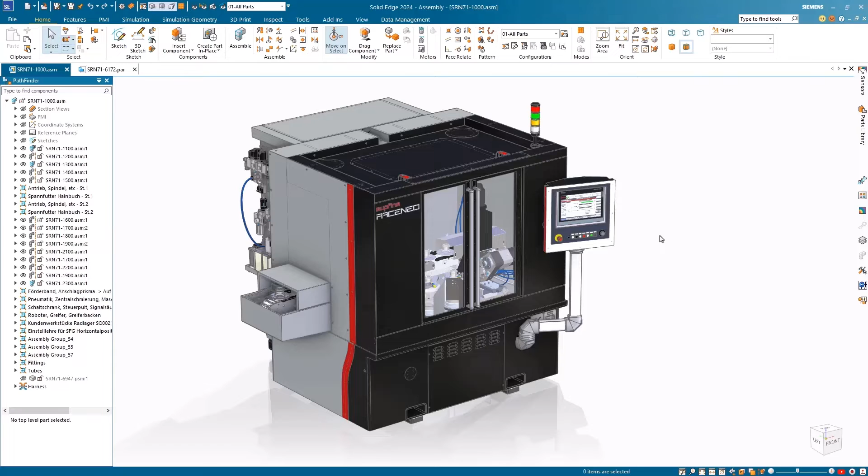Intelligently define and annotate 3D models while better conveying design intent for downstream manufacturing processes with the new Solid Edge Advanced PMI and model-based definition capabilities.

The improved Auto Dimension tool in Solid Edge Advanced PMI can be used with one or two datums for more freedom while automatically dimensioning turned parts.

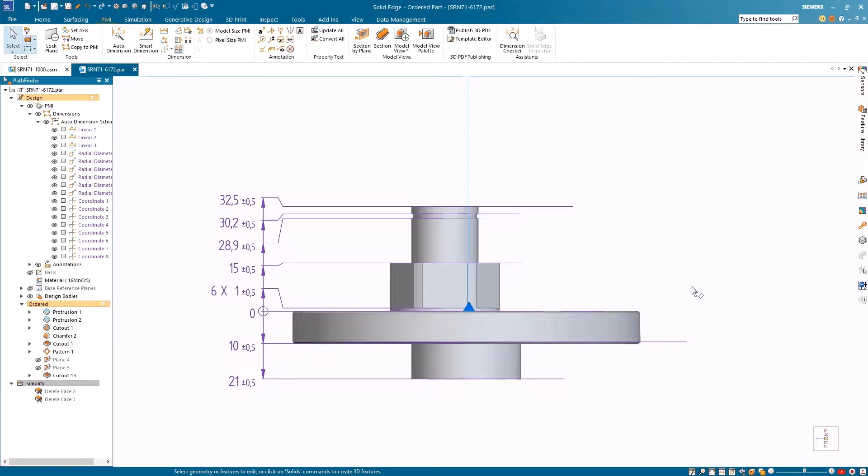Using the new Recent Documents preview will open another bracket that's been partially dimensioned.

With the new Dimension Checker command, quickly and easily identify the constraint status of features and parts. The model is automatically color-coded with feature IDs, informing you of the constraint status of features and if they lack any tolerance information.

In this example, the slot and holes are under constraint, and a dimension is missing a tolerance value. By adding the necessary tolerance, Dimension Checker will instantly update with the new status, and the Auto Dimension tool will automatically add the missing location dimensions for the holes, improving creation speed.

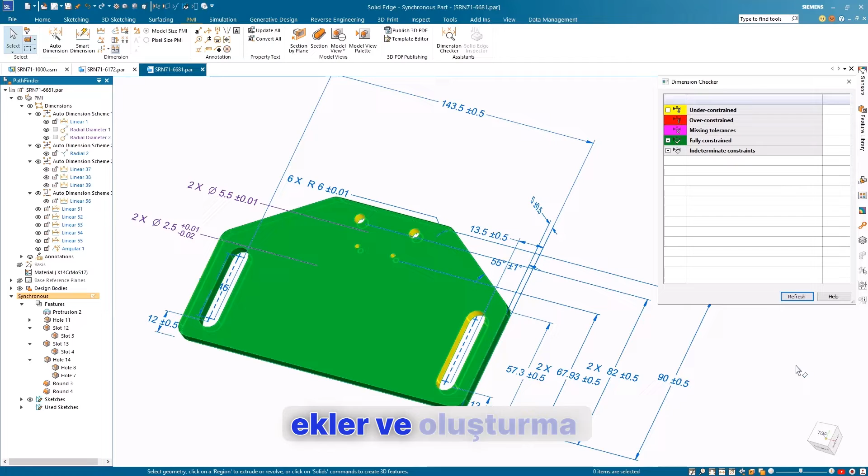The improved Auto Dimension tool also includes stacked dimensions and callouts for slot and oval cutouts. Features chosen in the selected primary, secondary, and tertiary planes can be auto-dimensioned instantly, and you can now automatically dimension location and size callouts for your created slot and oval cutouts.

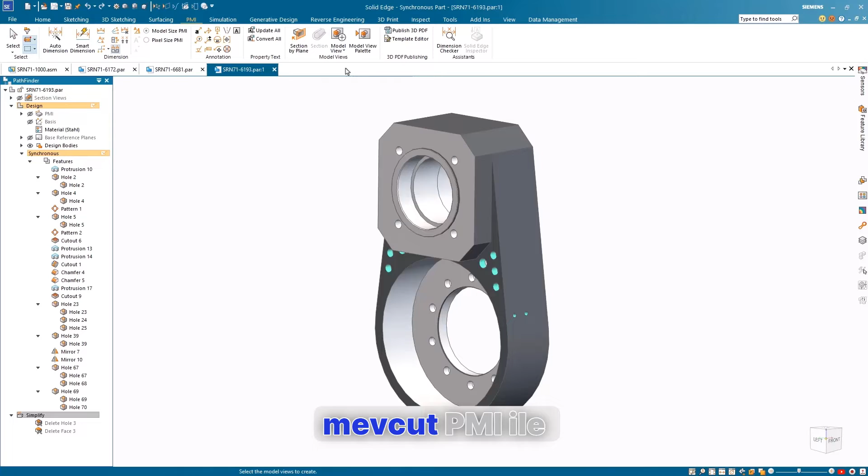The Common Model Views command allows users to create common model views automatically with the existing PMI. With the required views selected, Solid Edge automates view creation.

Applying section views to a model view is easy with the enhanced vertical command bar that can be launched from the Model View palette. These easy-to-use command bars make editing model views simple, like adjusting the render mode as we see here.

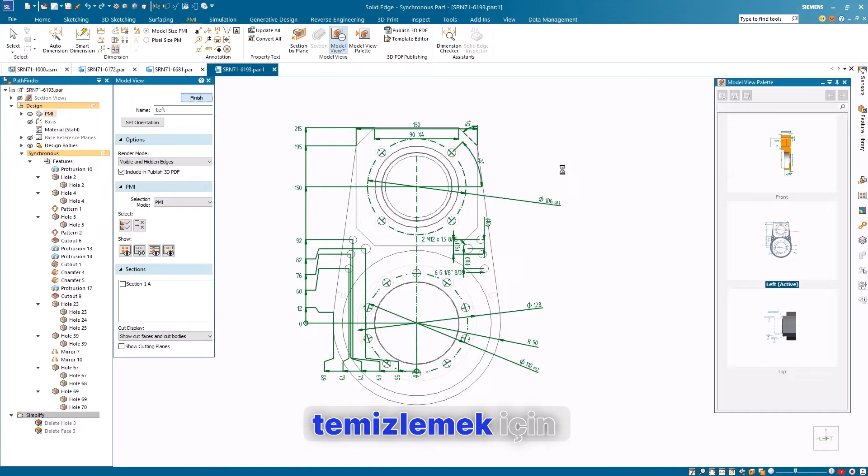To clean up the PMI dimensions, we'll run the enhanced Arrange Dimensions command, which provides the ability to arrange coordinate dimensions alongside the linear dimensions.

The Update Model Views command automatically updates all model views when the model changes or PMI is added or removed. Auxiliary plane indicators can be added, giving you more freedom to annotate the models based on ISO or DIN standards.

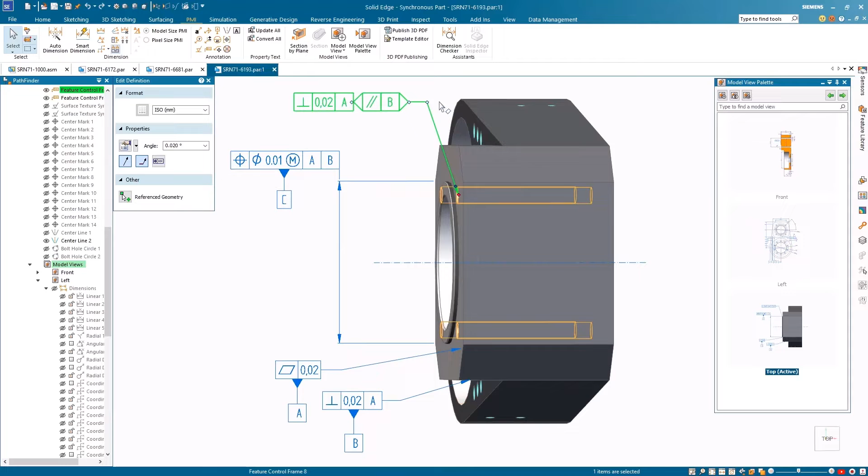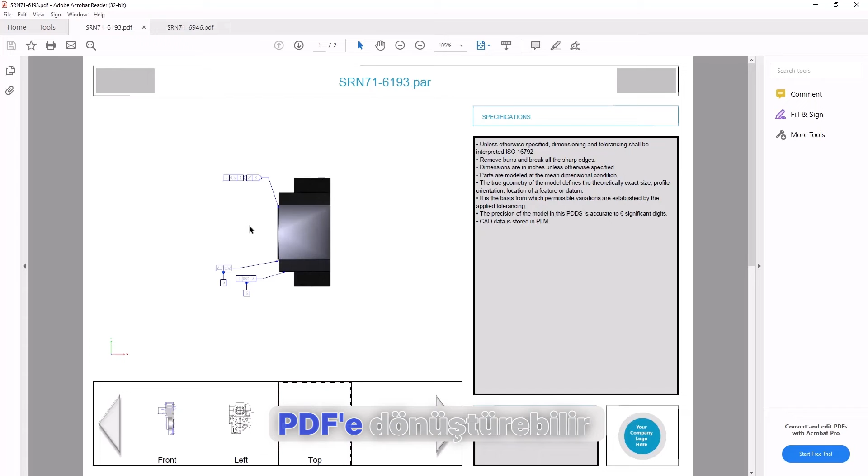Convey design intent for downstream manufacturing processes with 3D PDFs that can be published using templates. You can now export PMI views with selected section views and render styles to the 3D PDF, including those created with single planes, to streamline the delivery of relevant design information.

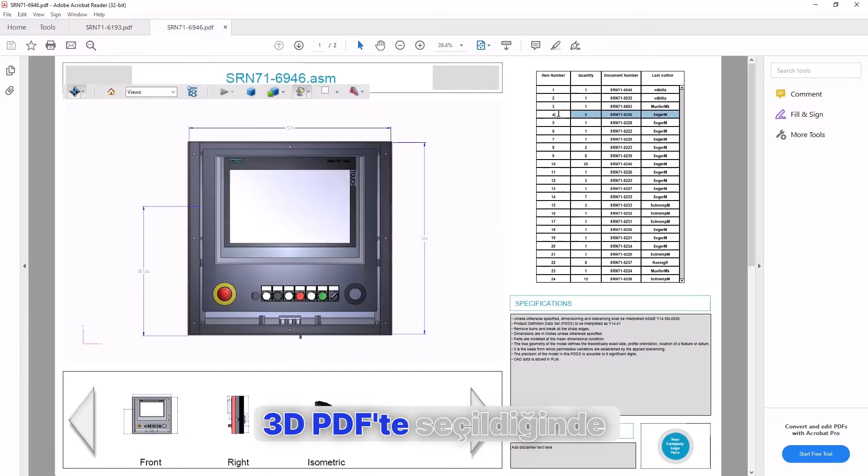With new PMI face association, parent faces and saved views are automatically highlighted when they are selected in the 3D PDF. For assemblies, 3D PDF documents can contain an interactive parts list.

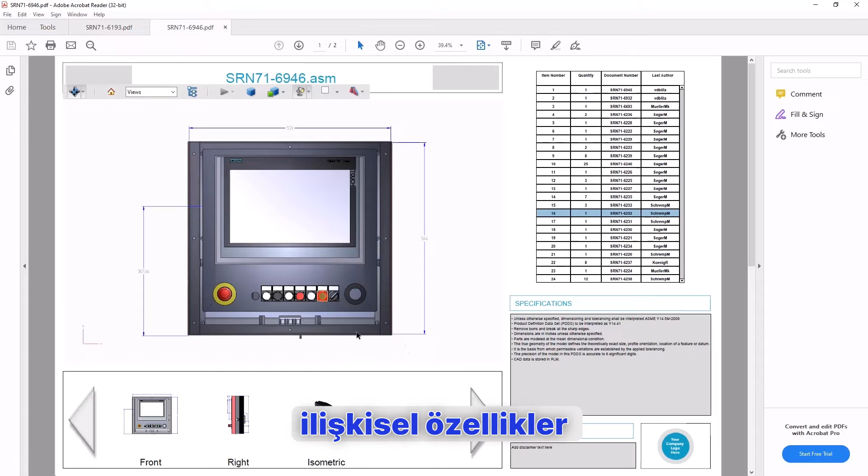On selection, parts are highlighted in the list and graphics window. Associative properties such as author can also be included. STEP, AP242, and JT files can also be generated and added as attachments within the 3D PDF.

Interoperability enhancements allow your Solid Edge files to look the same when opened in other Siemens accelerated portfolio solutions such as NX. The improved PMI association and support for various PMI data provide increased connectivity for downstream applications.

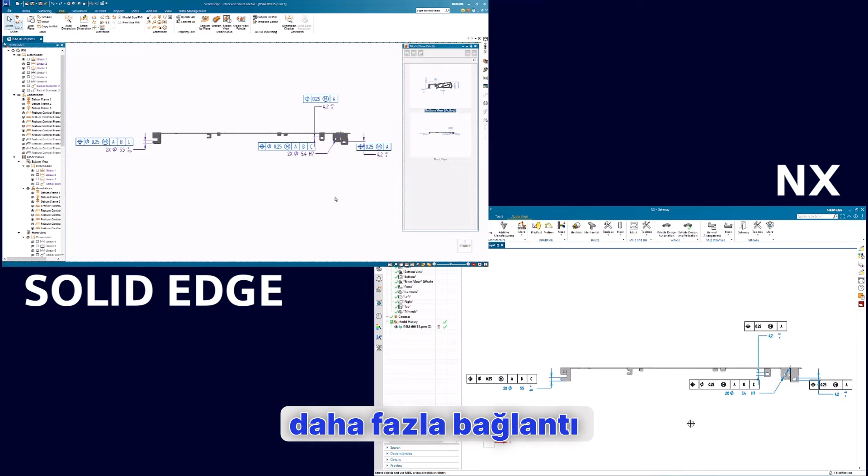With Solid Edge Advanced PMI and model-based definition, you can intelligently define and annotate 3D models, better convey design intent for downstream manufacturing processes, and unleash the power of intelligent design.